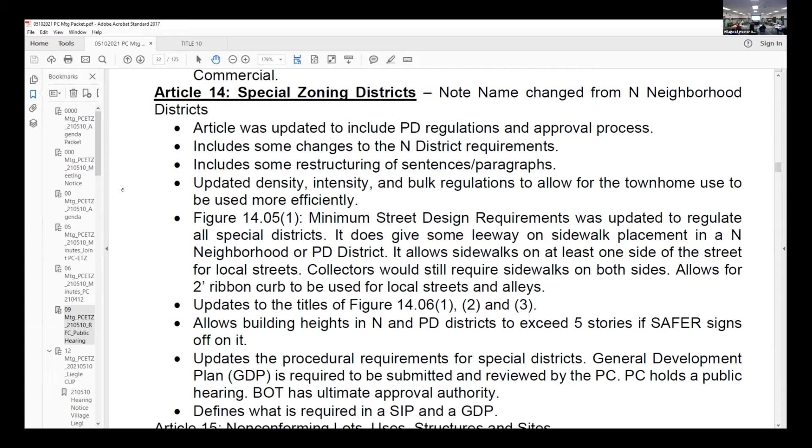Yes. The only reason I wanted to confirm that is you're deleting 94.2.02 sub 4 sub A. That's on page 2-5 in the normal numbering, page 24 of the 325 red line. In that section, that's the section listing the purposes of the standard zoning districts.

In most of those districts, it's really nice from an ETZ perspective because there is a sentence in most of them that talks about whether it's private or public water and sewer. So when you delete this section on neighborhood district, the sentence 'development within this district is served by public sanitary sewer and water services' gets deleted as part of this subsection. Yes, you have it up right now.

And so there's a new section 14 with the new special zoning districts, and you have the subsection for them that is listing and purposes. Let's see if I can find the exact phrase—listing and purposes of special zoning districts, on page 250 of 325 in the red line. But when I looked in subsection 1, which is the PD district, and subsection 2, which is the N district, that phrase specifically outlining that it's served by public sanitary sewer and water services didn't get picked up in any of these.

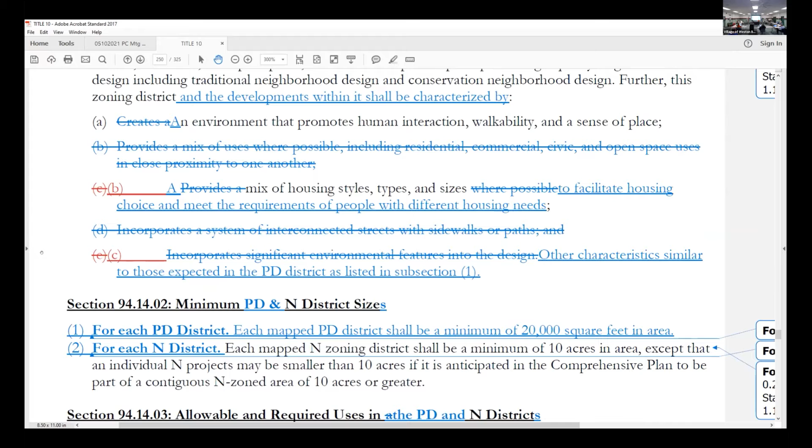I am not saying I don't know implicitly, because I looked through your sections as to what's required under an N or a PD, and it's inherent in all your engineering stuff—it talks about showing a map with the proposed connection to sewer and water and those types of things. So it's implicit that if you're going into this depth of a zoning change and requesting it, it would have to be sewer and water, but we just lose that phrase. I don't know if it matters to staff to have that phrase in, but I wanted to mention I couldn't find it in the revisions after the deletion of that paragraph. In all the other districts, we are pretty clear whether it's private or public sewer and water. So for what it's worth, that's my only comment. Everything else looked great, I thought.

We can add that in. I think your comment is quite valid. I think you could probably have a planned unit development on a private system. We had like a cluster development that could have its own private sanitary system as well. So that's a very valid comment.

I know that your future land use map, at least the 2016 one, specifically showed in the ETZ the neighborhood districts—is that still your current map? Yeah, it is. That's why I didn't want to get confused, because there obviously are chunks of land out there that have a for sale sign on them.

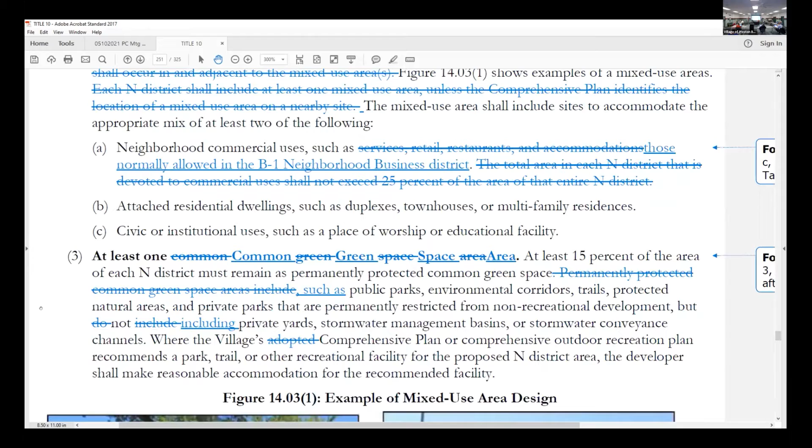If the motion comes up, it's my understanding that the motion could include additions. Right, yeah, cool, this is the time to give us any changes before it goes to the meeting.

Is that sentence that's being deleted—'the development within this district is served by public sanitary sewer and water services'—is that a statement or a sentence that staff is comfortable with? Or do you want to suggest other language?

I can take a look at it. I think it just got changed out of the front because we were putting it in the district. No, that whole district got changed. The N district used to be its own article, and the way it was written, it's kind of a special district now. So they just referenced the special district, and that probably just got lost. So we can figure out how to add it back in.

So we're still under presentation by staff. Any other questions from staff or by staff?

Okay, item C, public hearing, public comment period. If the public wishes to speak at this hearing, please, if you haven't filled out the public comment form, please do so, and you can turn it into the clerk prior to the meeting. However, we will allow in-person comments at this time, still limiting your comments to 5 minutes. If you wish to comment on this particular item, item 9.

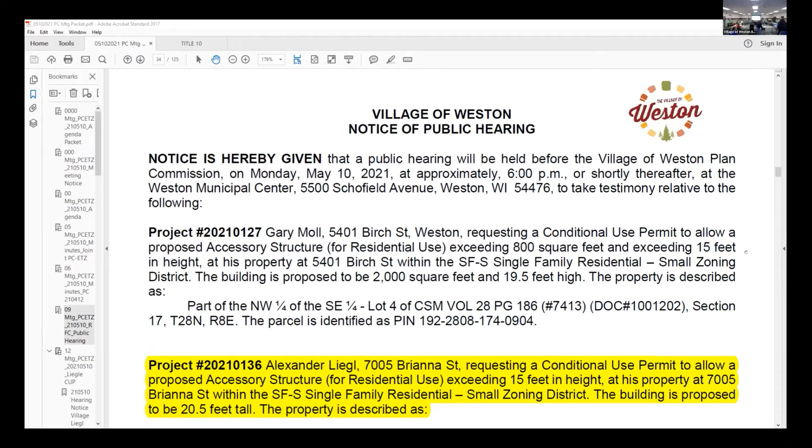We'll move on to item 12. I want to apologize right ahead that I may not get this last name correct, someone please correct me. Public hearing, project number 20210136, Alexander Liegl, is that correct? Liegl, sorry, let's say that. Thank you.

7005 Brianna Street, requesting a conditional use permit to allow a proposed accessory structure for residential use exceeding 15 feet in height at his property at 7005 Brianna Street within the SF-S Single Family Residential Small Zoning District. The building is proposed to be 20.5 feet tall. The property is described as part of the northwest quarter of the southwest quarter, lot 2, CSM volume 2525, page 167, doc 966223, of section 24, township 28 north, range 8 east, village of Weston, Marathon County, Wisconsin. The parcel is identified as pin number 192-2808-243-0984. I'll open the public hearing.

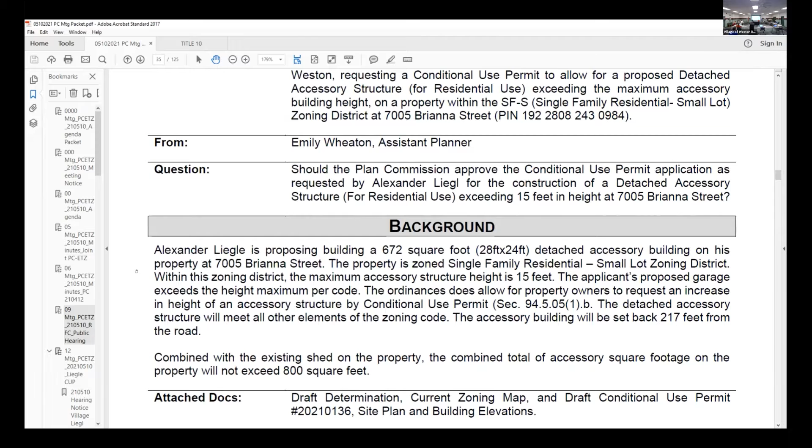Presentation by applicant. AJ, if you'd like to give a presentation. Please state your name and address for the record. AJ Liegl. I'm just looking for the building height to go to 20.5 feet over the 15-foot standard, the reason being for just having a little bit more storage area.

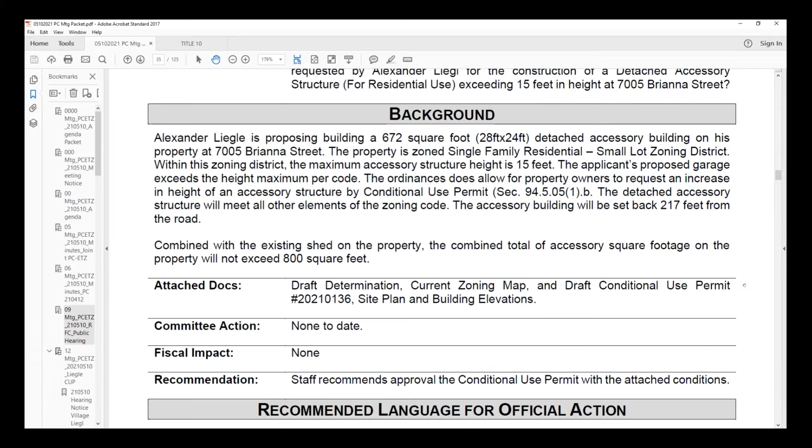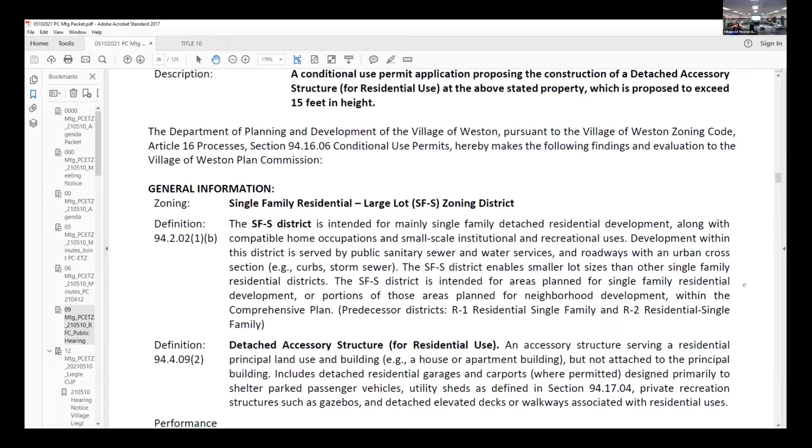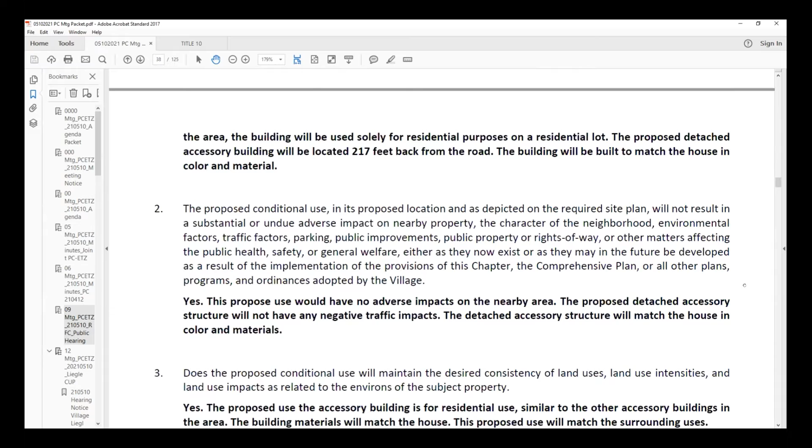Does the plan commission have any questions for Mr. Liegl? What's the current height on the existing facility, the existing home? I don't know at the time. Is your proposed garage taller than your existing home height? I believe it's probably pretty close to the same. If it's a one-story house, it's about 18 or 19 feet typical, depending upon the roof pitch.

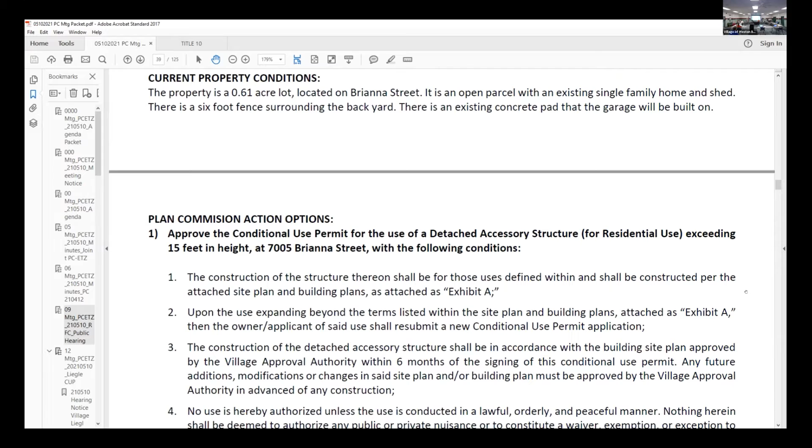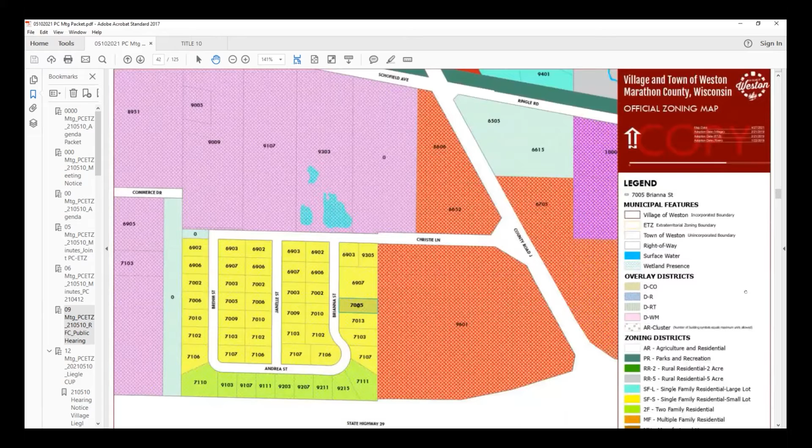So what type of storage are you planning for this building? Are the trusses going to be engineered to carry a certain amount of weight? Yes, it'll be engineered, I believe the size would be 12 feet. They'd be engineered just to have storage for seasonal stuff such as chairs, kids' toys, and such, nothing out of the ordinary weight-wise. Any other questions for the applicant?

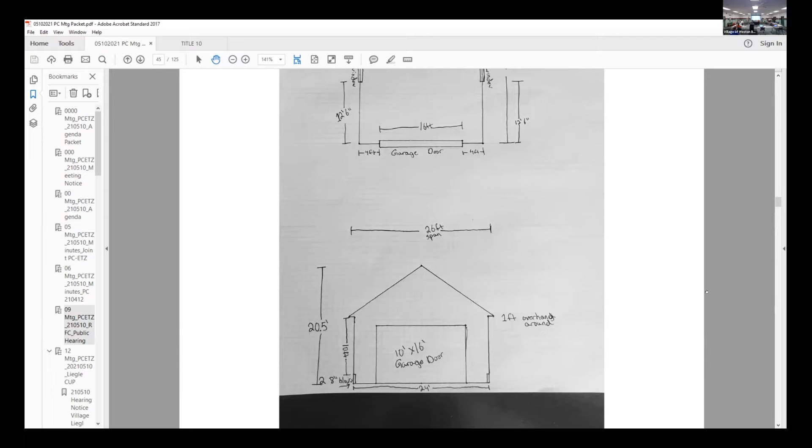Item C, public hearing, public comment period. This is the point in the hearing where the public can make comments for or against. Is there anyone that wishes to speak for or against? Is there anyone who wishes to speak for or against? One last time, anyone wishing to speak for or against? Anyone on social media or Zoom that wishes to make a comment? None. I'll close the public hearing.

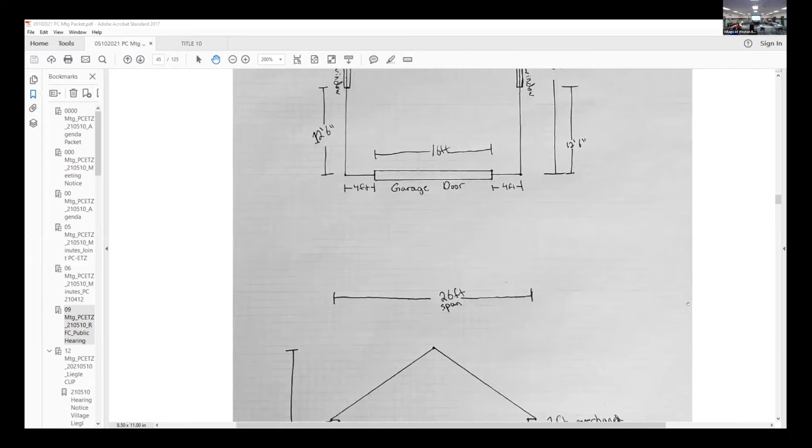Discussion by Plan Commission. Commissioners, comments, observations, questions? Short discussion.

Staff report: the proposed building is 672 square feet. In addition to the shed, he does still stay within the 800 square feet total permitted for the zoning district. So one of the reasons for going taller is to not have to go larger, and thus avoid needing a conditional use on either side. Staff recommends approval.

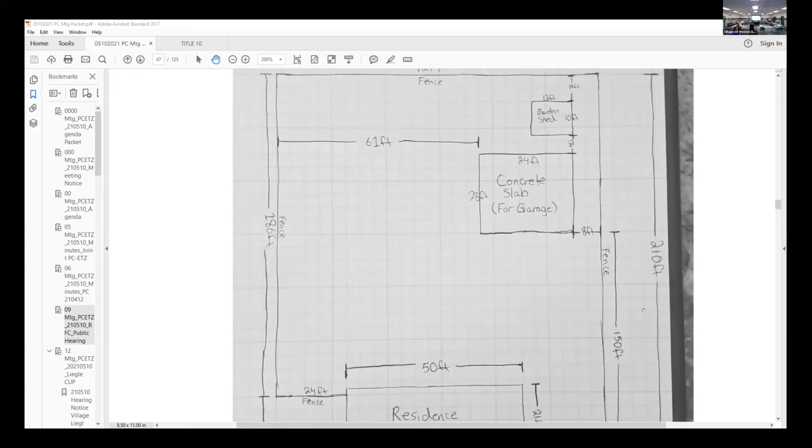I have a question for staff. Considering some of the problems we've had in the last couple of years concerning layouts of buildings, are we assured that this is within the setback distances of the lot line? As in, do we know where the lot line is? We've had discussions in the past about drawings on a napkin and how accurate they are. What he has presented does meet code. Once he gets the permit, Scott and Roman will do another review, and then when it's built they'll be checking that it's actually what it is in the field.

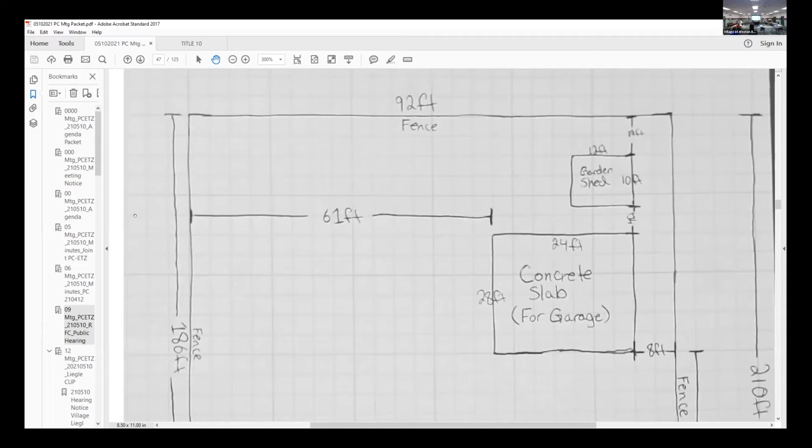Building inspectors will check before he lays the slab? Well, it's utilizing an existing concrete slab right now. Okay, thank you, that answers the question. Any other questions?

Item G, action by plan commission?

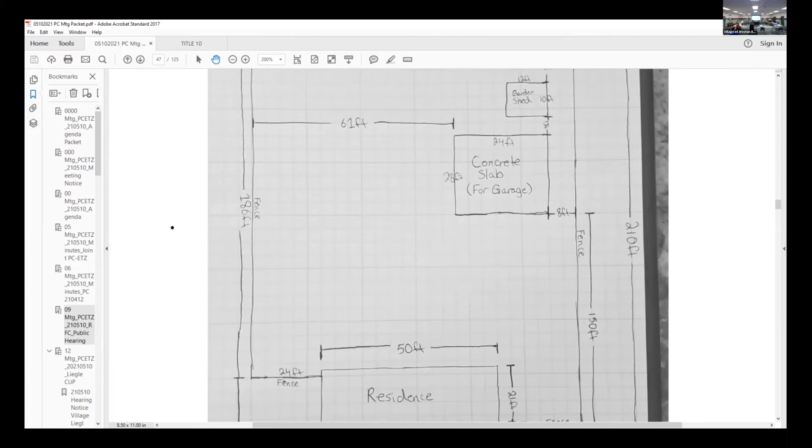I move to approve conditional use permit 202-10136, allowing a detached accessory structure for residential use exceeding 15 feet in height at 7005 Brianna Street. Moved by Cronin, do we have a second? I'll second that. Second by Minell. On the question? All in favor, say aye. Aye. All opposed? So carried.

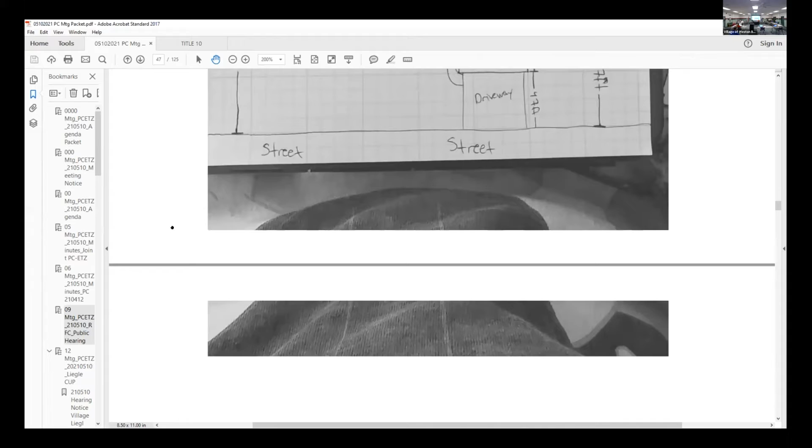Item 13, project number 20210127, Gary Moll at 5401 Birch Street, Weston, requesting a conditional use permit to allow a proposed accessory structure for residential use exceeding 800 square feet and exceeding 15 feet in height at his property, 5401 Birch Street, within the SF-S Single Family Residential Small Zoning District.

The building is proposed to be 2,000 square feet and 19.5 feet high. The property is described as part of the northwest quarter of the southeast quarter, lot 4, CSM volume 28, page 186, Doc 1001202, section 17, township 28, range 8 east. Parcel is identified as pin number 192-2808-174-0904. And I'll open the public hearing.

Presentation by applicant. Is Mr. Moll present? Step forward, name and address for the record, please. I'm Jess from Quality Built Garages in Merrill. My address is 5411 Snellgart Drive.

And I'm here to represent Mr. Gary Moll. I recognize a few people around here, thank you. Valerie, did you get that? Hello? Yes, I did. Thank you.

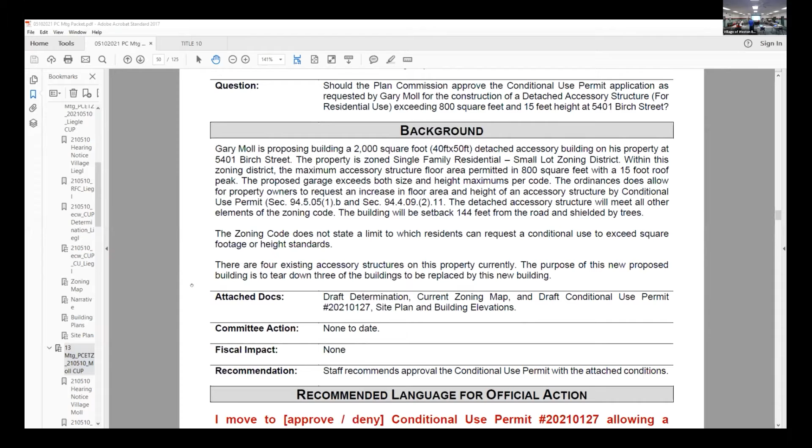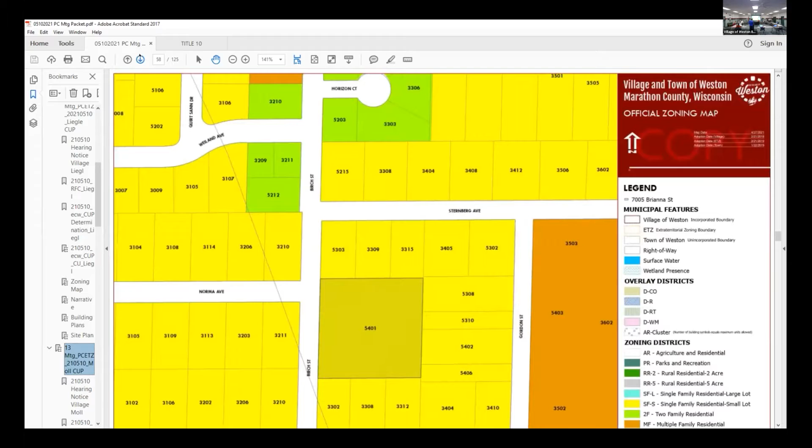Please continue. Okay, this is a project very typical to a lot of them that we do. I don't know, in your packet, do you have any pictures of what the property looks like at this point? If not, I've got some color pictures I could send with you. We have a scenario where he has multiple buildings on the property and they're all pretty much chicken coops. He has an extremely large yard that he is building on, and he would like to build a building that is actually not quite 2,000 square feet. He can cut back his request to 1,600. He'll take it if he can get it.

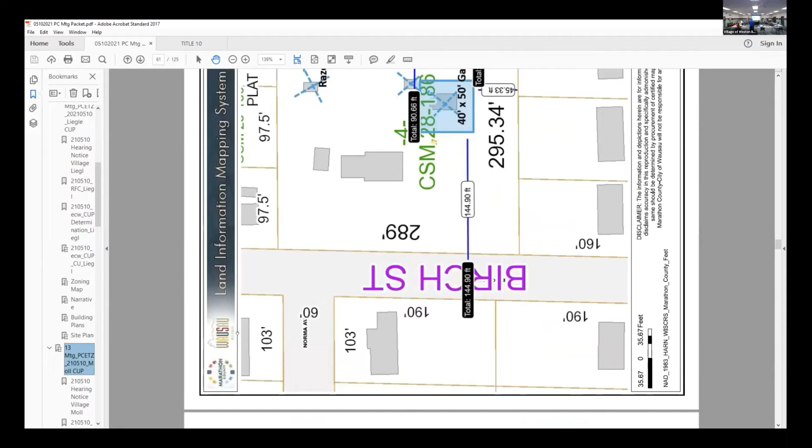The building we propose is to raze and remove the existing structures for a new concrete slab. His slab is located in an ideal spot. The property is surrounded by tall trees and he's substantially far off of his property lines. The building we proposed, I don't know if you've seen it in your packet or not, but we have, I would consider, there you go. I'm actually a building drafter myself, so we try to build structures that are very aesthetically pleasing. What you see here is what anybody driving by in a car or otherwise would see from the street. Everything's being updated, the electric, concrete slabs. The homeowner's doing nothing. It's a turnkey project for him.

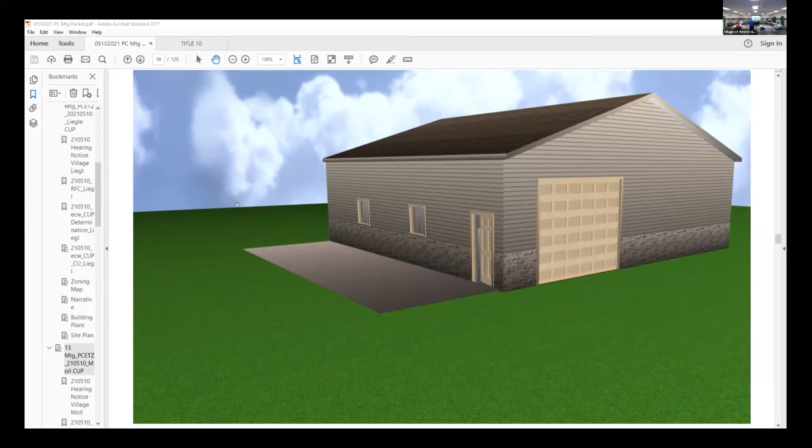The building height is exactly 19.2, give or take a fraction of an inch, but his house I estimate to be about 16 feet and some inches, but it might be a little bit higher depending on where you measure from around the house. Any other questions you might have for me, everybody?

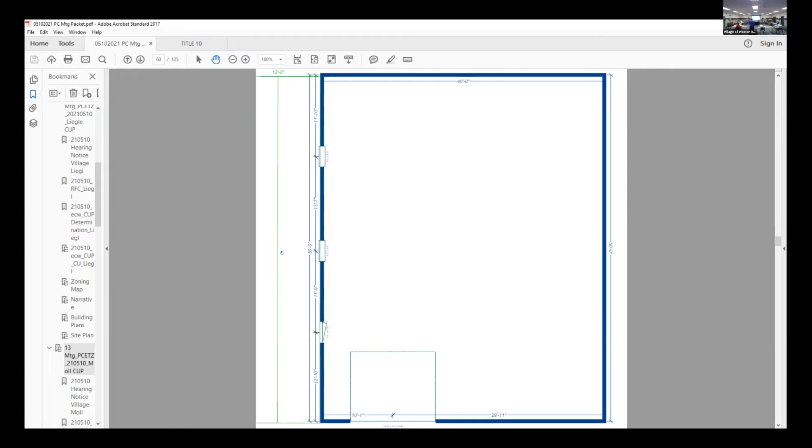Plan commission members, questions? What is this being used for? He's got a lot of cars and they're kind of parked in the trees and they're in his yard, and generally his buildings are full. I see he's got some other structures there too that we're cleaning up, but essentially his building is just to store his own personal toys. There's no business of any sort going on there. He's not a mechanic or something like that, for stuff that's not zoned for business. Yeah, that's exactly it. Well, it's good for the garage business, but people sure have a lot of toys. They need places to put them, so there we are.

Are there any other questions for the applicant or representative? Okay, thank you. Don't go too far yet.

Item C, public hearing, public comment period. Are there any written or other comments? None? Is there anyone that wishes to speak for or against, in the audience and or on Zoom?

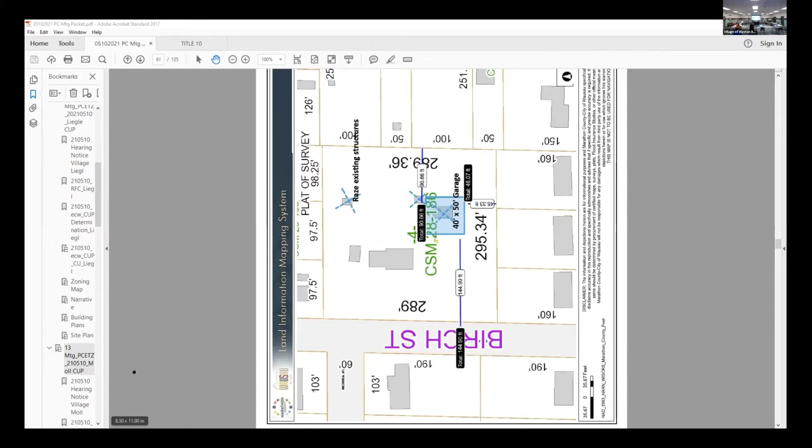Any other discussion by Plan Commissioners? Okay, staff report. Basically what Jess said, we believe it would help clean up the lot, consolidate down from the excessive number to one nice confined area. It would help collect items that are sitting out in the yard into a confined area. So we recommend approval.

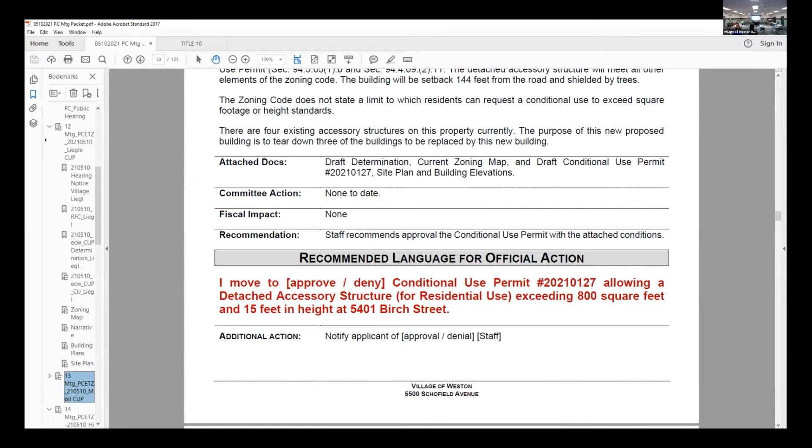Item G, action by Plan Commission. I'll move for approval. Moved by Minell for approval, second by Garrett. On the question, all in favor say aye. All opposed? So carried. Thank you, thanks everyone, thanks Jess, I'll be there tomorrow.

This next one is not a hearing, correct? It is. This is the rezone, item 14. Thank you, and comp plan amendment. Right, item 14, project number...

Pardon me, this will take a while to read. I think you can reference it if you don't wish to read it all. We'll be here just for a couple hours then. That's not fair. I think you should have to read it.

I will. Okay, a rezoning of the northern 918,713 square feet, 29.091 acres more or less, from RR5 rural residential-5 acre zoning district and AR agricultural residential zoning district, to MF multiple family residential zoning district, and land use designation from planned neighborhood to multiple family residential. I will read each one of these in its turn, or all together.

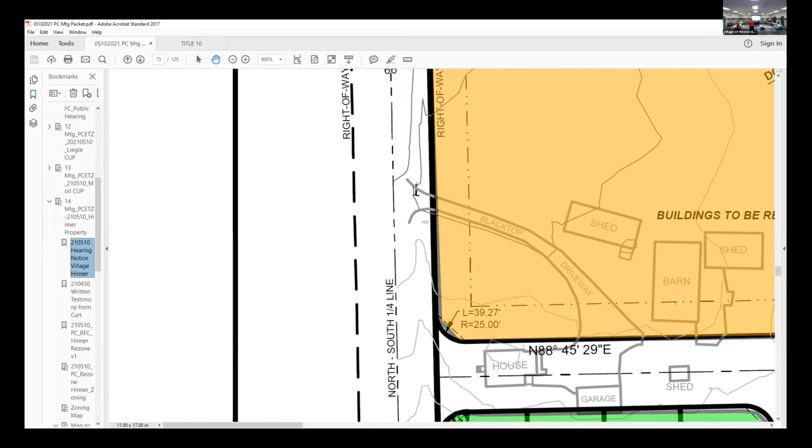The townhomes that you saw in the concept plat, that's what I'm saying, there's zero lot line down the middle of the duplex. That's what my question was. Also, as a point of order, we're only talking rezone right now. The preliminary plat division is later on the agenda.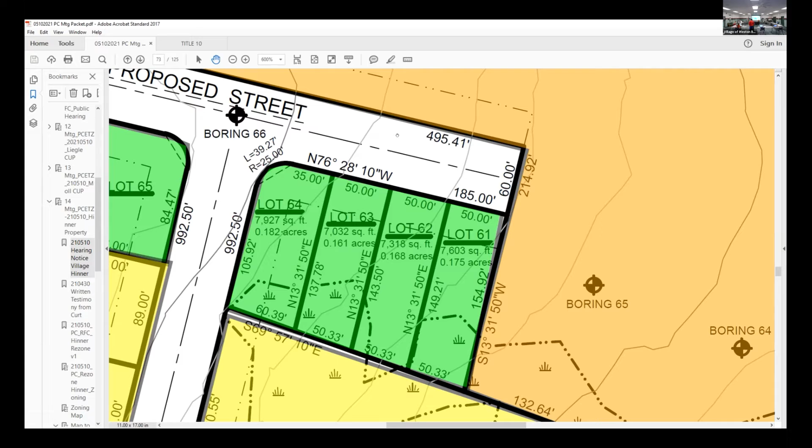Any other questions for the applicant? Thank you, sir. Don't go too far. Item C, public hearing, public comment period.

At this time, the public will be allowed to make comments either for or against this particular project. Anyone wishing to speak for or against? Yes, sir. Step forward, name and address for the record. Dennis Wada, I live at 9002 Birch Street, just down the way from this. I guess it's okay to ask questions here. I've never done this before.

Sure it is. So the multifamily portion that we see there, it's my understanding there's another development happening closer to Camp Phillips in this case. Will this end up connecting to that in any capacity? Most likely, when they come in for development, we would ask for some type of connection, just so there's more than one emergency access into it. Not necessarily like a thoroughfare, it would probably just be the residents inside that could go out either way.

Got it, okay. And how many units are we talking for the multifamily? We think if we develop it, we can get 80 some units on there. But it depends on if it's single story, 2-story, or 3-story, that's all a factor. But there's a significant wetlands on the north end, and wetlands on the east side, plus the high lines on the east side. So that whole area can't be developed. Got it, okay. There's a gas line going diagonally through the middle of it. Right, okay.

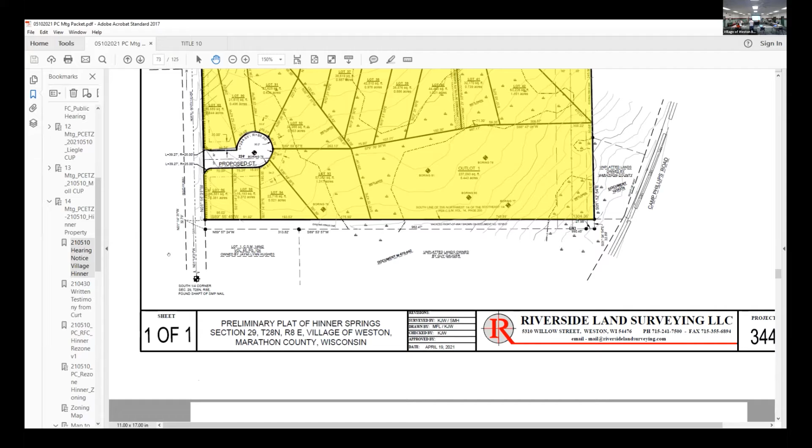As far as any stop signs on Birch Street, I was thinking, just looking at the map, to the north of here you're gonna have quite a few homes coming out at that intersection. Does that butt up with Leyburn, or is that actually north of Leyburn? Yeah, so it doesn't ever actually create a four-way stop. I guess that's what it was in my head - some sort of control there that slows people down.

It's been my experience that people living in a neighborhood like our subdivision are gonna find what they think is the shortest way out, and what you think is really goofy, they think is the greatest thing - it's really hard to plan for where these streets are gonna come out. I personally would see them coming up to the farthest north and then onto Birch myself, but that's just me. Yes, there will be traffic on there, especially morning and evening when you have people coming and going. Of course, nowadays, a lot of people work from home.

I think that's what I've got for now. Thank you. Is there any question? Gary, do you have a question?

This is off subject, but while we're talking with Michael - is Birch Street gonna be curb and gutter on both sides to collect stormwater as well? The survey just got done about a week ago, so we don't have that set, but the initial thought would be we'd likely keep the ditch sections just for maintaining the DNR regulations for stormwater. If we upgrade to curb and gutter, then we have to treat it somehow and try to find a pond. I thought I saw where it was planned to have concrete ribbon shoulders. Yeah, so it'd still be - but that'd still be ditches.

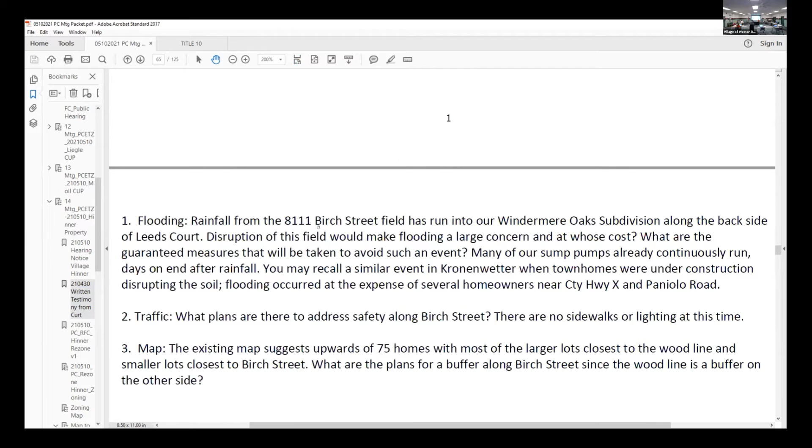So the village has received an email from Betsy Villard, is that correct? I think it was from her husband. Her husband, okay. At any rate, it says: please see my written testimony regarding the proposed rezoning project at 8111 Birch Street. I have concerns about the project for the following reasons. It was included in the packet, and I don't know if you have seen them.

Okay, the first question talks about flooding. I'll read it: flooding - rainfall from the 8111 Birch Street field has run into our Windermere Oaks subdivision along the backside of Leeds Court. Disruption of this field would make flooding a large concern, and at whose cost? What are the guaranteed measures that will be taken to avoid such an event? Many of our sump pumps already continuously run days on end after rainfall. You may recall a similar event in Kronenwetter when townhomes were under construction, disrupting the soil. Flooding occurred at the expense of several homeowners near the County Highway X and Paniolo Road, something - Aniola, yeah, something like that.

Two, traffic: what plans are there to address safety issues along Birch Street? There are no sidewalks or lighting at this time. And item three, map: the existing map suggests upwards of 75 homes, with most of the larger lots closest to the wood line and smaller lots closest to Birch Street. What are the plans for a buffer along Birch Street, since the wood line is a buffer on the other side? So who wishes to address these?

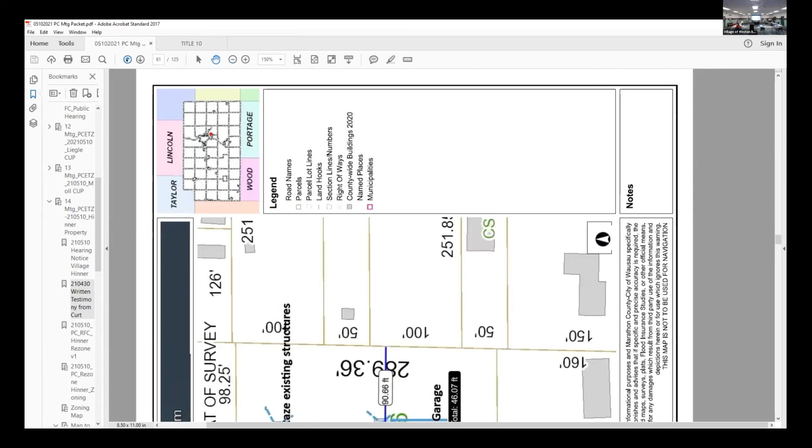Sure, I can address the second two. Michael can help me with the second, and then he can handle flooding. So regarding the map, the reason they're larger on that one side is it's the wetland, so they were made larger to accommodate that they're not buildable. So that just got shifted to those lots. There's wetland on the east side and not the west side as much, hence the smaller lots on the west side.

In regards to the buffer, code doesn't require a buffer on Birch Street as it's a local street. Local, versus arterial - that would be like Schofield Avenue, Camp Phillips is considered an arterial road. At that point, it would be required to put a buffer to any houses that would back up to that kind of road. But since this is local, the code doesn't require it. Most people will probably put fences up when they build houses, is typically what we see. Birch Street - there's the Birch Street reconstruction with sidewalks and I believe some lighting going in, Michael. It's going to install lighting at intersections, as default.

So Birch Street's getting redone to accommodate pedestrians and walkability there.

And I think that covers those two questions. For flooding, I'll defer to Michael, who can answer because you referred to DNR conforming with DNR standards. With this development, they can't shed any more water off the property once everything is constructed than what they have now. So there should be no more water coming off the property—should be way less. I would think developing this would help channel water into the proper channels more efficiently.

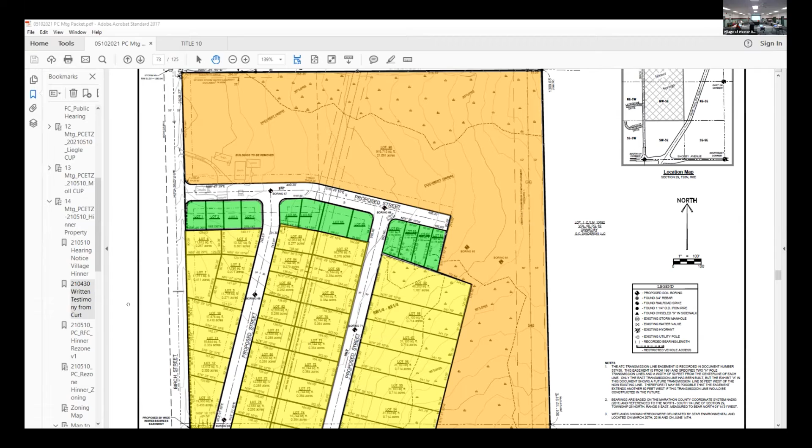Mr. Garrett? Michael, at this point, can you comment on the width of that road? Is it similar if you zoom up onto the map where 7805 is - is it widened out enough, is that the presumable width of the road, or is that opened up to 4-lane up there? I just can't remember if that's right at Weston Avenue. It gets wide enough for the turn lanes there, and we're not looking to put in a 40-foot section of pavement like it is by Birchwood Highlands.

We're looking at more of maybe 28 feet. And then the pedestrian walk would be on which side - the east side? Yeah, because the west side, you're right, everything drops off into those properties. So right now, that would be a major benefit to anybody living on the west side if you kept all the water retained and into the village ditching and stuff to get it out of there.

Mr. Cron? I'm just curious what your timeline is looking like right now. We'd like to continue the plans, finalize, get all the approvals, and start construction this fall yet. Okay, and how soon do you think you're gonna have a design for Birch Street? We probably have a final design by this fall, probably look to bid it, and start construction right away in the spring.

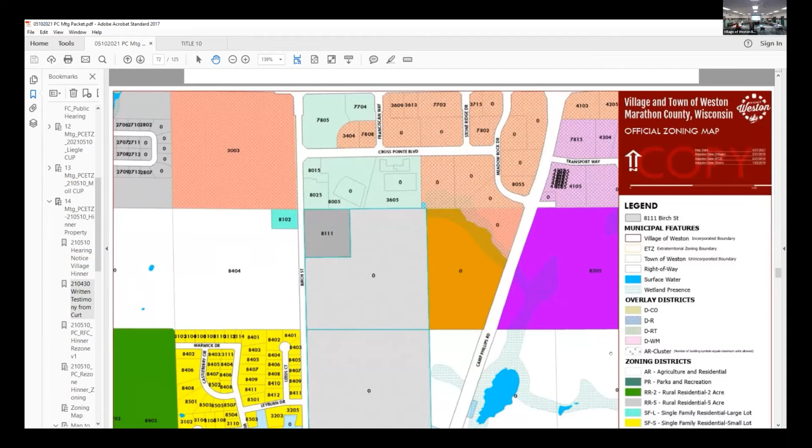My name's Heath Tappy, owner of Denny Homes. A couple things we're talking about: one is the internal stormwater system will take all the water to the southeast, so there shouldn't be impervious surface from this subdivision going out to Birch Street. I think it's a separate issue from the Birch Street reconstruction, in my opinion.

I wonder who has jurisdiction over speed, is that county or village? So it would be the village, it's village ordinance. So however, we can support whatever the village recommendation is with that. It's involved with Everest Metro. We do follow the state guidelines for setting speed limits on roadways as far as the distances and what you can set them at, because if you set it at a speed that's lower than it says you can, technically you can't enforce it. I don't have a concern either way.

The other thing is I met with the village, probably as early as October of last year, maybe sooner, and identified this property because it was a property the village recommended to be developed in the future. Our goal would be to be prepared to begin construction on August 1st. If the bids and things don't come out, we've got to get our developer's agreement finished, get the bids in, and see where the numbers are at. The other option would be to start later, but we'd like to have everything ready and approved for construction as early as August 1st.

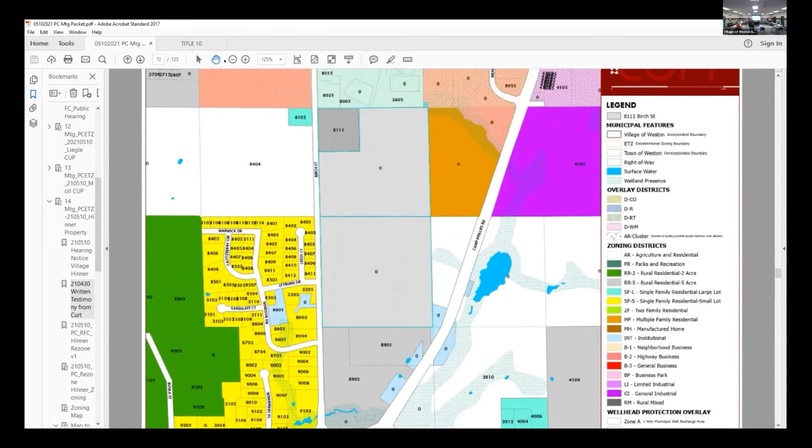I live at 8404 Birch Street, right across the road there. I got an up-to-date abstract on the road. It's a 3-rod road in front of me. You get up to the end of my 40, it turns into a 4-rod road. I don't know what it is south of me along Windmower Oaks. On my property, my abstract says I got a 3-rod road.

And if it's a 3-rod road, I'm not gonna have a problem with the road coming too close to my house, but if somebody pushes the button there a little bit to change it to a 4-rod road, then the right of way comes right up to my house within a few feet. Something to think about. Yep, and like I said, the survey was done last week, I don't have that data back yet, so when we get that information back, we might have to go with a curb section along part of it. There's still unknowns, very premature, as to how it's gonna work, but we'll figure it out.

Yep, understood. We are still under public comments, correct?

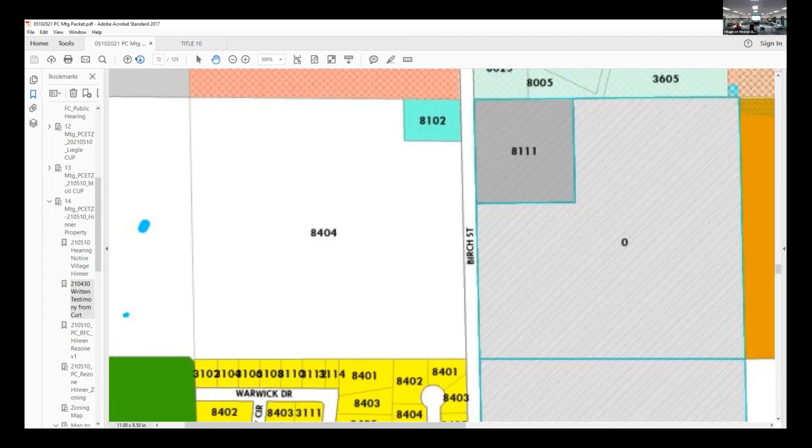Any other comments from the public, either on Zoom or phone or in person? For or against? Hearing none, and no one else, Michael?

Mary, your hand is still up, do you have another question or no? Nope, sorry about that. That's all right. Your arm must be tired by now. Okay, I'm gonna close the hearing.

Item E, discussion by plan commission. Commissioners?

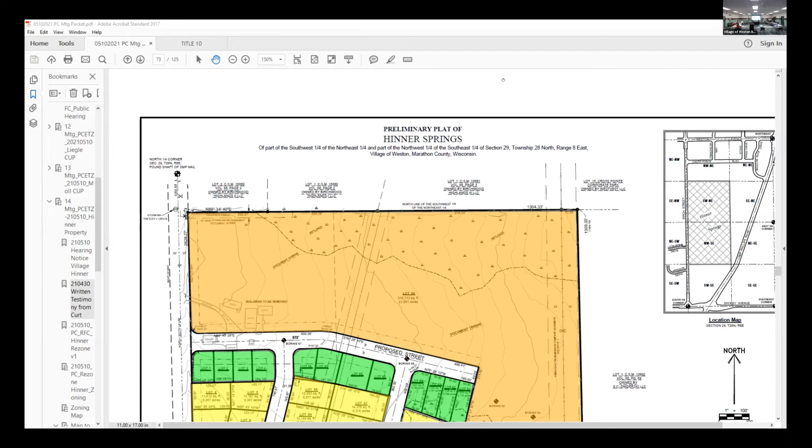Mr. Garen asked, do we have a hammerhead or something that's just gonna be gravel at the end of that proposed street, the dead end on top? Is that close enough to the intersection for fire and ambulance access? They asked for it just to go through.

Point of order, we're talking about the rezoning here at this stage. Sorry, the preliminary plat is the next item underneath. So you're being asked first if you're okay with recommending to the board a change in the comprehensive plan, and then recommending the rezone. The board would then take and have a public hearing on the comprehensive plan amendment.

I think it would be at their meeting on June 21st. And then they would, if it's recommended, act on the rezone at that same meeting. For consistency, the comprehensive plan amendment has to take place first. So you're being asked to change the future land use map, and then they're asking to rezone it into three different zoning classifications.

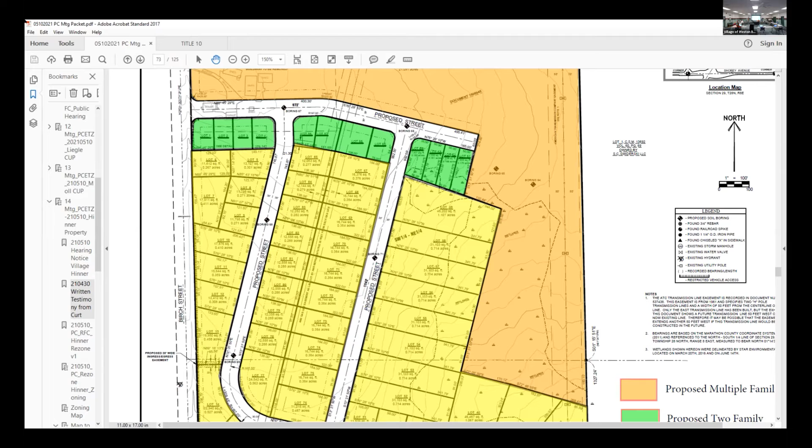So I have a clarification question. We're actually gonna take two actions at the end of this hearing, correct? You'll recommend it by resolution to the board - this one, that's the resolution - which would then get moved on to the village board and given to them at the public hearing. And then you would be asked to recommend the rezone. Two actions, correct? Two actions, correct. Thank you for the clarification.

No, as Emily said, this area was looked at as being kind of a mixed use, transitioning with some type of multifamily to the north into a single family subdivision. That's basically how it's been looked at for the last number of years. We have heard information about a subdivision going in, and there's a multifamily project to the east, just conceptual at this point, nothing more.

Right now, we're just talking about the rezone and the comp plan amendment, correct? Yeah. And then the next item is the plat, correct? Yep, okay, we'll explain that.

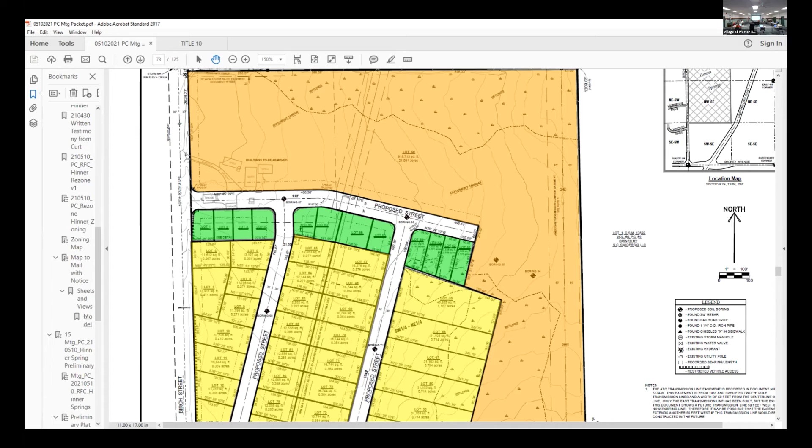Anyone care to make a motion? I vote for approval. Mr. Marnell? I'll second. Do you have any stipulations that you want for that? Not for the rezoning. Okay, sorry.

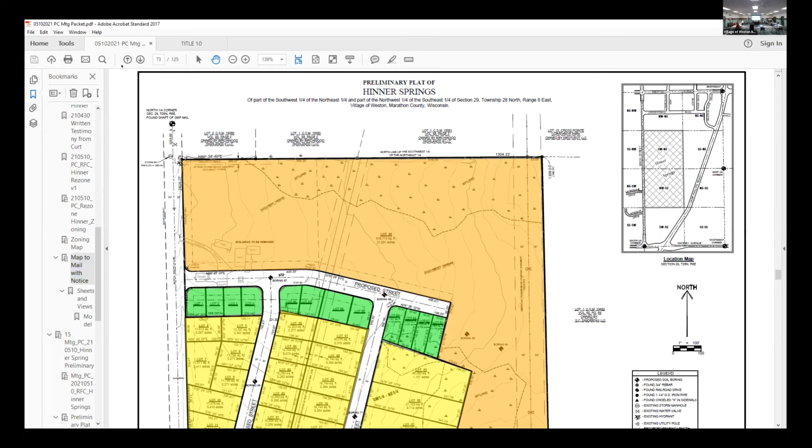I guess you could add to the rezone a stipulation that it would be contingent on preliminary plat approval, because you don't want the rezone to go through if the preliminary plat never reaches final. Would you like to amend your motion? Yes, to include that the final plat is approved.

I second. Has it been motioned and seconded? Valerie, did you get the motion? I'll take that as a yes. Anything else on the question? All in favor say aye. Aye. All opposed? So carried.

Thank you. Are we on to item 15? Okay, new business, project number 2021-0077. Discussion and action on a proposed preliminary plat for the Hinner Springs subdivision.

Since we haven't had a preliminary plat for quite a while, I don't think this group has ever seen one. The way this works is we have to put in whatever we want that final plat to look like. Anything you want to see in the final plat needs to be listed as conditions of the preliminary plat. As long as they meet all those conditions, when the final plat comes in, it gets approved. So this is the time that you get what you want into this development.

We've given you a few recommendations in there. I know that we interpreted the discussion at the conceptual stage with the sidewalks a little differently than the applicant did, so that's something to discuss this evening.

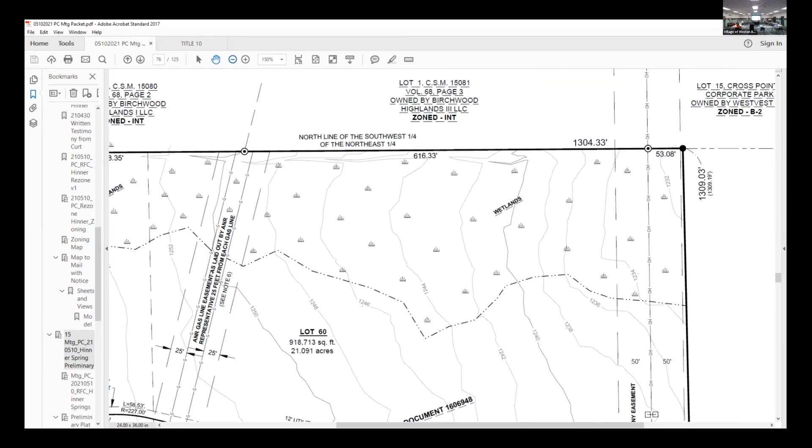They tell you pretty much right now, we don't have a preference of two or either, three. Oh, so space it out. I wouldn't either. It's gonna all go in that direction. Pretty soon all mail will go away anyway, except for junk mail. No, that's the first option.

I'm not sure, and maybe I'm out of order here, but we had a situation on another development where the post office wanted us to be responsible forever for those. I said, well, how can you do that? So I'm not sure, Heath, what they're requiring of you, but we just said no. If we're gonna put these in, they're yours. You can't be responsible for mailboxes or a hut or a building. If you're gonna build a building around here, they're requiring you to have coverage over these. I don't know who's gonna be responsible for maintaining these.

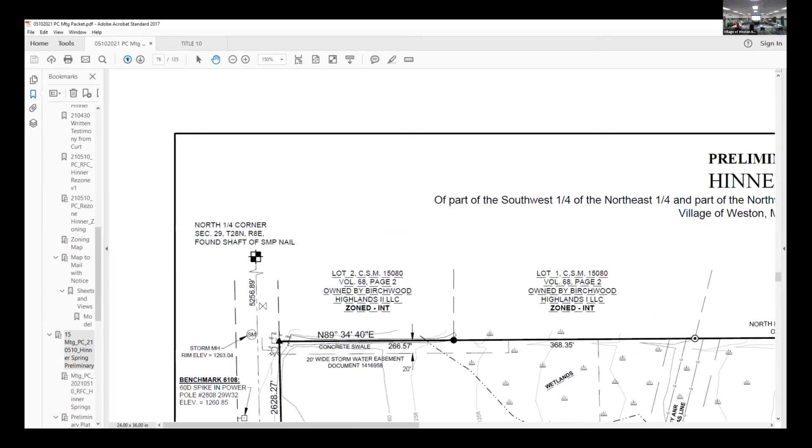Right, yeah, we haven't gone down that road, but we're not planning on putting a hut. We have a concept, yeah, he did give me the concept. So we've just done as much as we can, we just negotiate with them as good as we can. Plover has been the most aggressive in requirements of developers, and we're managing keys, and we have a whole five-page report on how to transfer keys and ownership, and there's been different challenges, we're just trying to make it reasonable.

So I guess the counter to what they're doing is everything's being delivered by Amazon, and I think big mailboxes, one in front of every yard, would be better because it would help the delivery services going house to house, but I don't think we're gonna get that, so we'll try to minimize. I think the last two developments we did, we have a pull-off, and I think they'll be reasonable.

Weston's gonna be different than Kronenwetter. We got different postmasters we're dealing with, and we just gotta negotiate. We negotiated with the one you purchased from us, Heath, to put a bank of at least a minimum of six to help that. But they make the route where they're gonna drive through. Not that the post person does that, but they somewhat simulate that to keep the cost down. They feel it's fewer stops for them, less on brakes, less on start-stops, whatever it may be.

What's the village's stance on what the post office is asking of the village? I don't think we have any choice. We're still trying to get the post office to recognize the village of Weston, not the city of Schofield. That's been going on from...

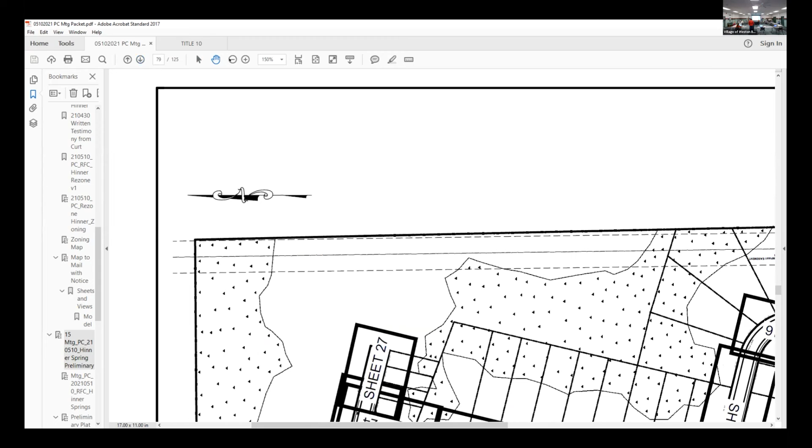Yeah, if I could speak to that. We were under the impression under the last meeting when we brought the concept plat in that we would do 2-sided sidewalks on the north road that goes east-west, because that has multifamily on the north side and the twin family on the south side. That would have more density population, and so we agree that should have sidewalks on both sides of the road. We were proposing sidewalks just on one side of the road everywhere else in the development.

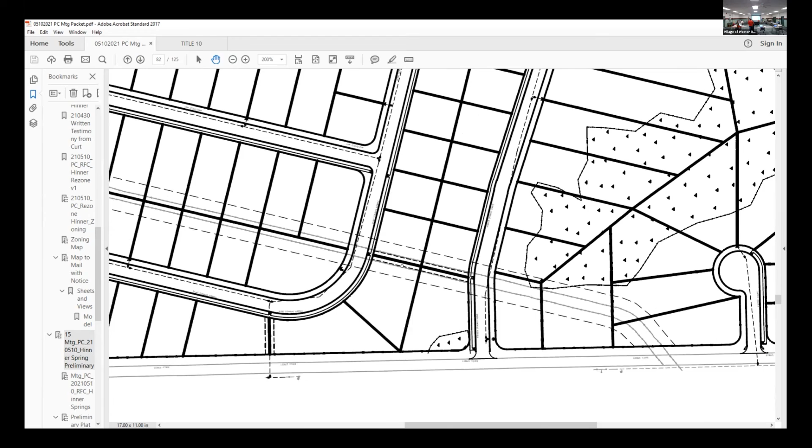To make it more palatable to the village, we were adding that sidewalk connection right at the very bottom of the page there, between the development and Birch Street, as well as between the lots along the ANR gas line. We thought that was a compromise from having the double-sided sidewalks. We thought the conversation among planning commission members was in favor of that, and I guess we were misunderstood when that motion came back to us that way.

From what I recall, Nick, I thought we discussed shortening the road out. And Heath, I thought you mentioned you'd be fine with the road being a little narrower, and you'd be fine with doing the sidewalks. I think we talked about several things, including mountable curb. Yes. Not with the understanding that mountable curb is an acceptable form of curb already anyhow.

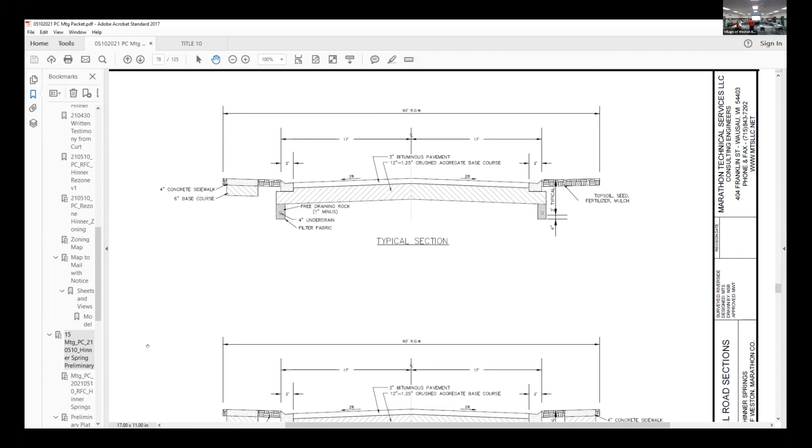And then I had conversations after the meeting, and we're still requesting it be on one side, as Nick is saying. We're not asking for the roadway to be narrower than code requires, so that's not like a variance or anything we're requesting to be different. I have a recollection that you originally wanted a 10-foot on one side of the road. The code allows for that, either 5 foot on both sides or 10 foot on one side, but we were never asking for that. We were always asking for 5 foot on one side. And we know you may say no, but that's our request.

I recall the conversations that we were talking about flag curbs, the regular flag curbs, but with the upright part of it, as a concession to do the mountable curbs. Either one is allowed, as long as it can catch the stormwater. Or the ribbon curb is allowed, which doesn't catch stormwater, but that's used with a ditch, designed for ditching. I agree, I'm just saying in essence, we're providing what's required by the code with the curb. We're not asking for a variance on that.

The only other thing that isn't really listed on your conditions that we were hoping to discuss, either here or maybe in the developer's agreement, is street trees. The village requires street trees every so often. The developers would like to see how we can make that work better. A lot of times they get planted up front and end up dying right away. We'd prefer if we can have an option to have one tree per lot, planted when the home is occupied or something like that. Maybe that's not part of the preliminary plan, but I thought I'd mention it now.

That'd be part of the development. I know, and I think we talked about doing that very thing. It's actually the preference of the village arborist to do it that way. Okay, thank you. You gotta tell your homeowners they need to water the darn things. That doesn't work? No.

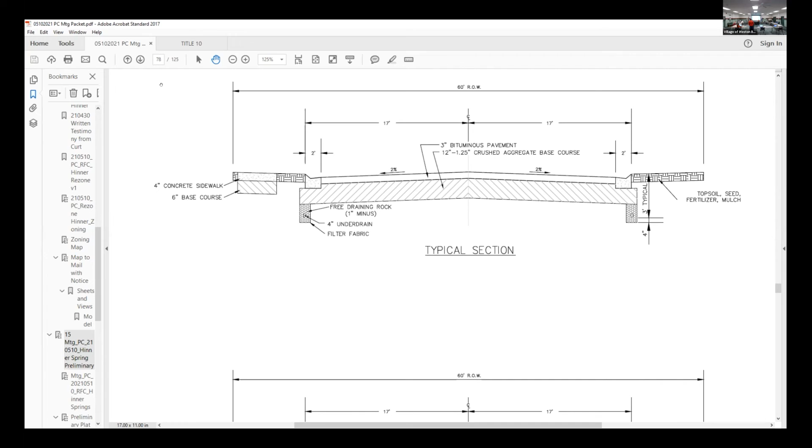I will say, take it for what it's worth. Part of the reason Jennifer opened the discussion about the preliminary plat, since most of you haven't been on the plan commission, is because there hasn't been development, because it's expensive. So it costs a lot of money. To put in a sidewalk on a second side for a 100-foot wide lot is approximately $2,500. So you're just increasing the cost of every lot by $2,500. It does add up.

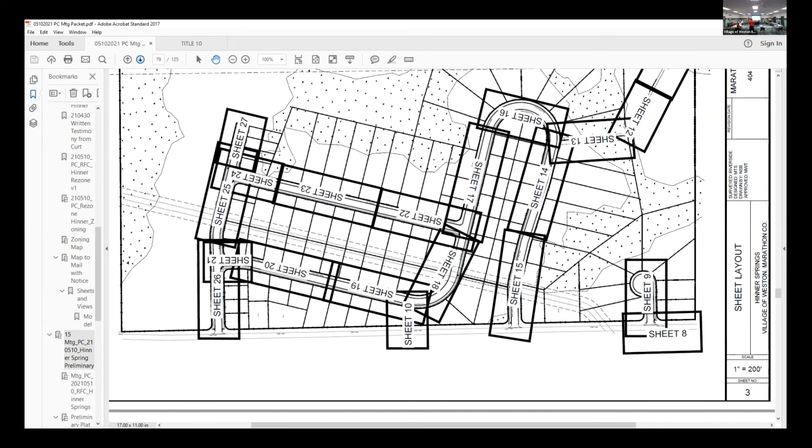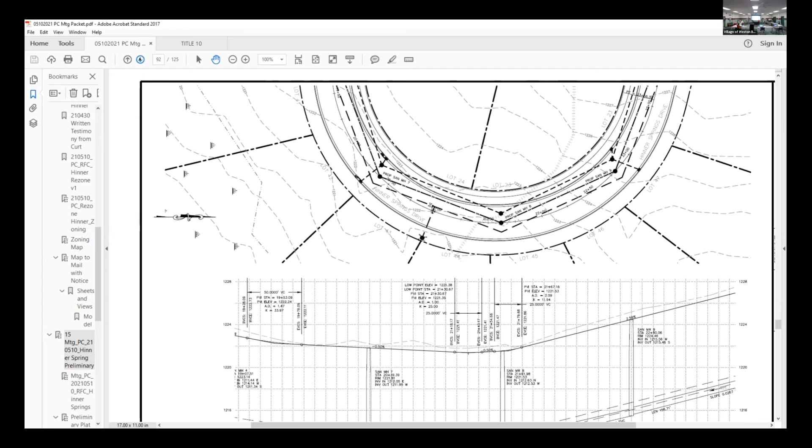I think Keith, you and I had a conversation after that too, or maybe even during the meeting, about adding whatever it was, $1,500 to $2,500 to each lot. I mean, to go backwards after 2 or 3 years when the residents there are complaining, or the kids are crossing the road constantly to get on the sidewalk on the other side. I know it's a savings, but I believe it's a short-term savings for other issues and other developments that don't have any sidewalks, and we hear about them constantly. We're very, very happy you guys are doing this development, but I have to agree, I'm not on the commission anymore, but I would agree that sidewalks really do belong on both sides for the families, for the kids, for that community out there. I just do.

So Public Works and Utility also approved the Crestwood Acres redevelopment and rebuild section and requires sidewalks on both sides. So the village is paying for the sidewalks on both sides. This is a new subdivision, I understand that, but we have held ourselves to the same standard. We could have gone with one sidewalk on one side, but we didn't. And all of us are paying for it, all of us taxpayers. I've been paying for both sides of the street for 40 years, and all of us have as property owners.

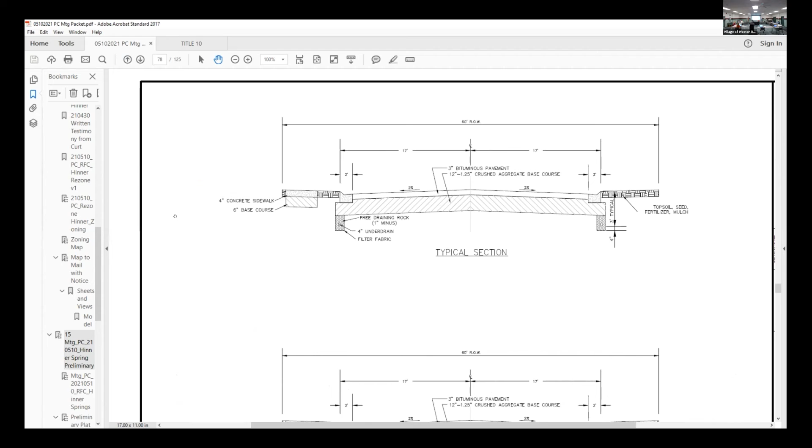Yes, sir. So I think that's a valid point, and it also is something that will have to be maintained in the future. So we talked about this at the last meeting - Windermere Oaks doesn't have a sidewalk in it. So you're going to be inviting foot traffic, pedestrian traffic, so it diversifies it a little bit, it gives people the choice. And you still have good foot traffic out to the 10-foot lane where you're trying to get traffic to cross Birch and use the trail system.

So it doesn't make sense, in my opinion, to have subdivisions like Misty Pines have sidewalks on both sides and have every neighbor from 3 miles around coming and walking your sidewalks, and not have a sidewalk anywhere else within 3 miles or whatever it is. So it seems like a good transition to future sidewalks, but same thing with Boulevard - when we started this conversation again back last year about village participation and being developer friendly and wanting the developer to come in, we haven't seen concessions or help, how we're going to help the developer. And this is one way that we can help, but whatever you decide, we'll honor it. I just think it's overkill.

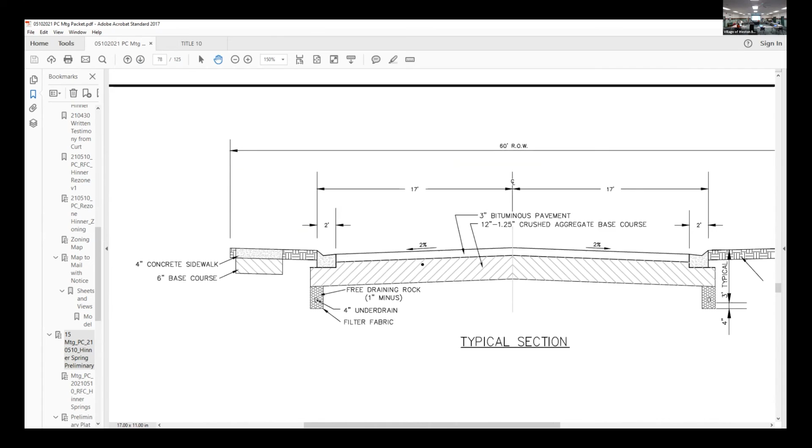The roads in Sandy vary between 30 and 34 feet of pavement. What they're proposing is 30 feet of pavement. That makes a big difference. Misty Pines was 24 feet of pavement.

Well, I think that's a bargain where potentially you keep the vehicles on the road and the pedestrians on the sidewalks. I think then you're willing to pay, I could be wrong, but if you tighten that road up, that could be significantly less.

I thought we talked about this, Heath. That was part of the conversation we had after the last hearing was, do we stay with... help me remember why we thought the wider roads were better? Did you have a discussion with Michael?

No, I don't remember talking. It could very well be, if somebody needs to... the motion that came out of last meeting was 60-foot right of way, 34-foot back-to-back curb. And that was you and me, and that was the motion. It could very well be because of extra parking.

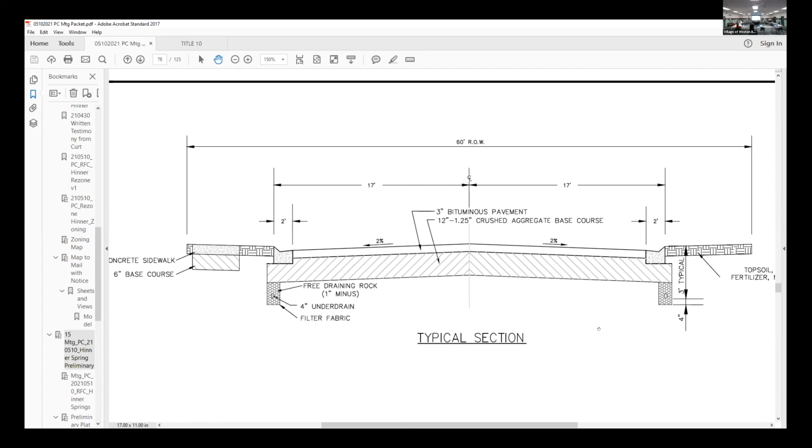And in this subdivision, maybe you can narrow it and put the sidewalk on one side without really having a public safety threat, because you're never going to run a road through the wetlands portion of it. There's no intention to connect this any other way, is there? To any other thoroughfares? No? The only connection would be to the potential multifamily to the east, but that would be internal more than a thoroughfare. I just throw that out there as an observation from a safety standpoint—I don't see a lot of traffic other than the lots that are having it.

Well, go ahead. I shouldn't say it, but sorry, I'm there. Go ahead, sir. So could we go to a 24-foot wide road like we have in Misty Pines and then do the sidewalk on both sides? Is that an option? That's up to this commission to decide.

Is that an option, Nick, for design? Would be for me. That's what we have in Misty Pines. I personally thought that's what we discussed last time, and I apologize if I misunderstood, but I thought we were tightening up the road and putting sidewalks on both sides. You said, I agree. Yeah, if we can tighten the road up, I'll put sidewalks on both sides. That part I do remember too.

Yeah, because I wanted to try to make a compromise with the development. We understand we can't expect to do a 34-foot road and then put sidewalks on both sides and trees, because it costs way too much. So the concession would be either keep the road width and put one sidewalk, or else tighten the road up and put two sidewalks. If we're that concerned with safety on both sides of the road, then we've got to make a compromise with the road and know that there's not going to be a bunch of people parking on the side of the road.

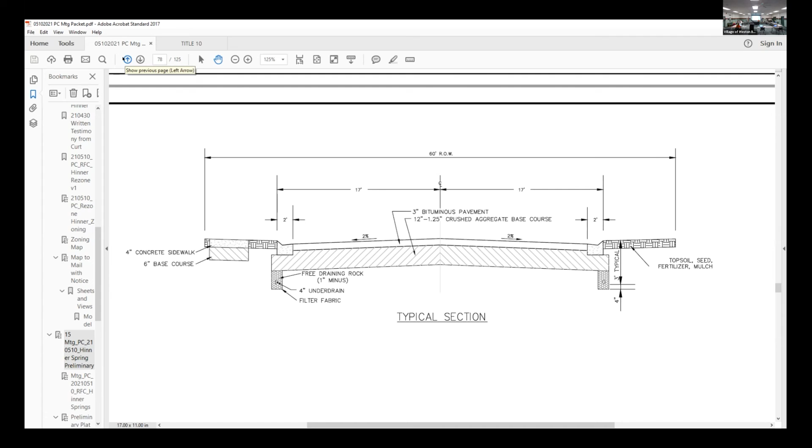Okay, anybody care to make a motion? I think if we make a motion, we gotta talk about, go ahead, sorry Joe. Okay, well, go ahead, you can talk before you make it. Guys do need to be very specific. Yes, we do. So we're putting it in a resolution for the board, that the board will adopt on Monday.

So, could you tell me what the required parkland dedication fees are? I mean, did anybody do that computation? Right now, because we have to bring the new one to you guys, it's $244 per single family lot. I don't remember it offhand, $20,000. What is the new one proposed at?

Well, the one that we brought to you guys looks at separating them. It's actually, you have to come up with a number because we did the impact study, so it could actually be a lot higher than what it currently is right now. It was broken into two fees. That was the suggestion from the plan commission.

One was for maintenance and one, am I saying this right, acquiring. The other one was for construction of parks. So it was looked at, but we're approving it as of right now. Yeah, we don't have the ordinance brought through yet.

So you would be under the $244, it's $20,252 for the 83 single family lots, plus the duplexes. For the duplex lots, it's a little bit higher, it's like 3 some.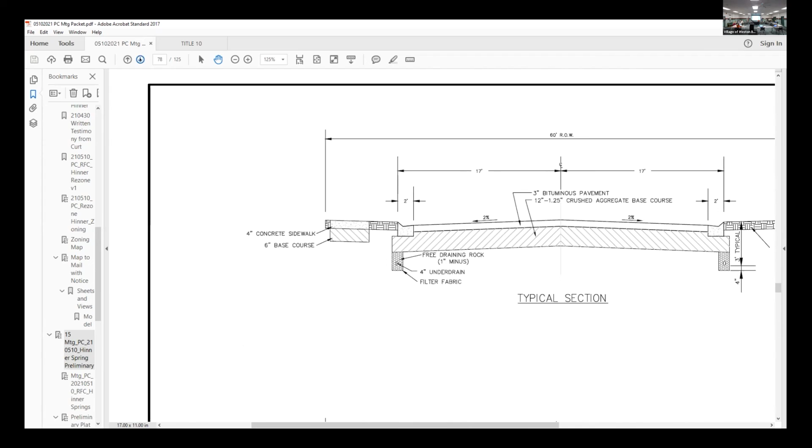Nick, I just want to confirm everything, because we had a number of requests tonight with the water out there. So I saw that it sounds like MTS was contracted to do erosion and stormwater management for the site. Do you think that's gonna, I mean, is this site gonna have any effect on what's going on with Birch Street on the west side, or do you think it's gonna make that better?

Yeah, can you pull up the overall map? I don't know who's running the screen, but I think it'd be better, I would say 90%. Well, I shouldn't say that, probably about 70% of the water, stormwater, when it rains, will end up in that southeast corner in the outlot.

There's a portion on the east side that drains eastward that will continue to drain eastward, basically the backyards of those larger lots in the wetland there. There is a small portion along Birch Street that will still drain to Birch Street. If you're on Birch Street, it's going uphill into the property, so there's a small portion, but that'll, in our plan, go into the ditch on the east side of Birch Street. It should never get onto the west side of Birch Street.

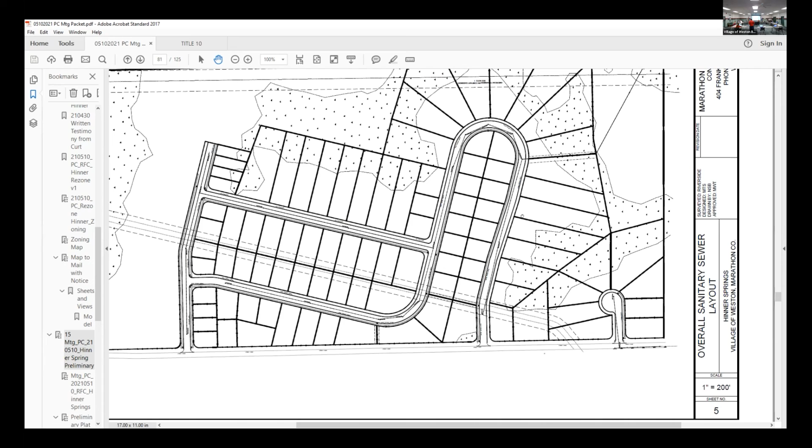The DNR and the village require that we look at different rain events, so whatever it rains today on that land, we have to make sure we don't send any more water off once it's fully developed. There's also additional criteria for soil removal and stuff. So obviously we would plan for stormwater issues, that doesn't mean something can't come up, but we do everything we can to meet all the code requirements.

Sure, and I just want to make sure — we had a number of concerns about that tonight, so I want to make sure those concerns are answered. Mr. Garrett, do you have anything?

I was just gonna say, I believe it'll probably help the area out. Like Michael had stated earlier, you have so much water coming down Birch Street right now, and in the spring and fall you'll have some frozen culverts which wash across the road. So I'm assuming in their new road layout they'll probably upsize some culverts and have different designs to capture that. But I think, Nick, you've gotta keep everything on site — you can't make it go off site, it's gotta stay on your property.

Right, correct. One other point that Heath and I were just talking about — if it needs to be said now, we want to say it now. There's a potential that we would split this into two phases, a southern phase and a northern phase. I don't know, Jennifer, if that has to be delineated now.

No, because you would just come through with a final plat, and it would just be only part of it. And that would be part of the developer's agreement, correct? Yeah.

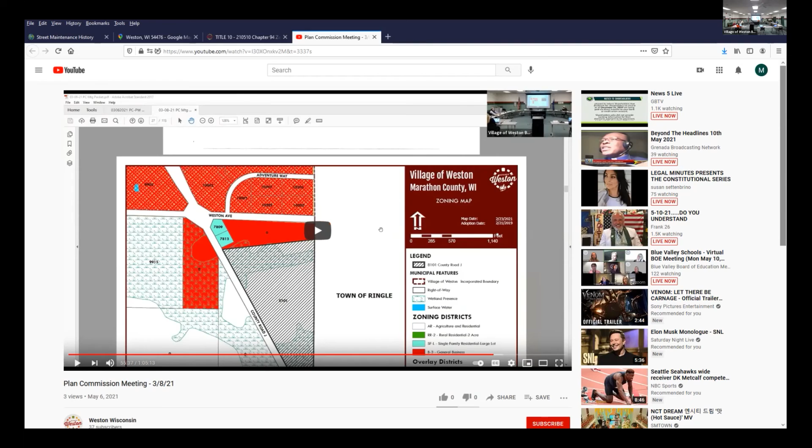So the one does connect to Birch Street, so that is actually kind of a crucial connection — can you go back to the map, Michael? It's crucial so you don't have to go all the way up to Stillwater Landing Lane or Maple. I completely agree with you, that one is kind of crucial.

But I think then there should be some fencing on both sides or something. I wouldn't want to own lot 14 or 13, would you? The lots are big enough, I think they're pretty wide — the house would be on the other side of those lots, so that's fine.

You guys are acceptable to it? Yeah, okay, I wouldn't mind getting rid of the one on the gas line. Why are we arguing, get her done. Nobody's talking about eliminating the gas line one — you're gonna have the 10-foot path right there on Birch, so those two sidewalks are really close to each other.

An example of that would be where the Eau Claire River Trail comes up between that subdivision, between Morning View and Tricia. Yeah, I live right there. Can you pin out where you're talking about, Michael? By the gas easement where Keith is — that's the gas line right there, so this is the gas easement here. Oh, yeah.

And those sidewalks are right up on their lots. If you want to get rid of the one over the gas line, I'm fine with that, and keep the one going out to Birch Street. Yep, I'm perfectly fine with that.

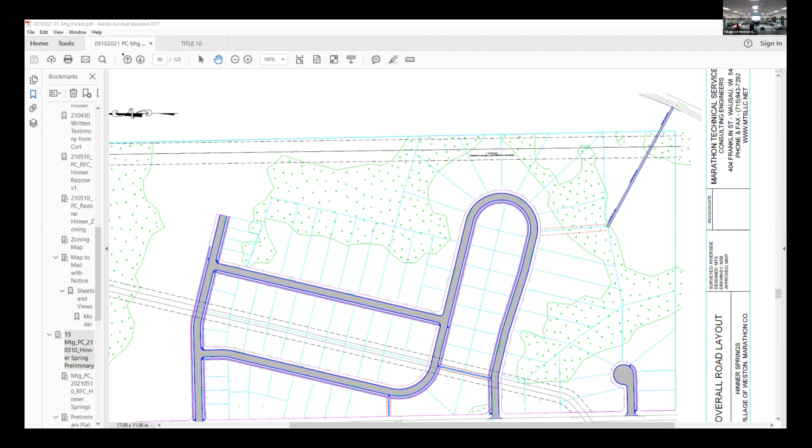I move to recommend the preliminary plat for the Hinner Springs subdivision to the Board of Trustees with the following conditions: to rename Stillwater Lane; to have sidewalks on both sides of all streets, but the overall width of the pavement to be 24 feet instead of 30; to require parkland dedication fees in lieu of land dedication; update the civil plans as approved by the Public Works Director; to utilize CBUs for mail delivery; and the execution of a development agreement.

So we have a motion by Mr. Jordan. Is there a second? I'll second it, second by Mr. Cronin. On the question: do we really want to get into the CBUs for mail delivery? If he can work something out with mailbox clusters, would we be okay with that? I don't know that we give a crap if they're CBUs, do we? I would maybe just put that they get approval from the post office. Yes, I really don't.

Okay, Mr. Jordan, would you care to modify your motion? I will modify number 5 to allow the developer to work out a plan with the mail delivery people. Okay, whoever seconded? I did, I second. Okay, second your modified motion. Anything else on the question?